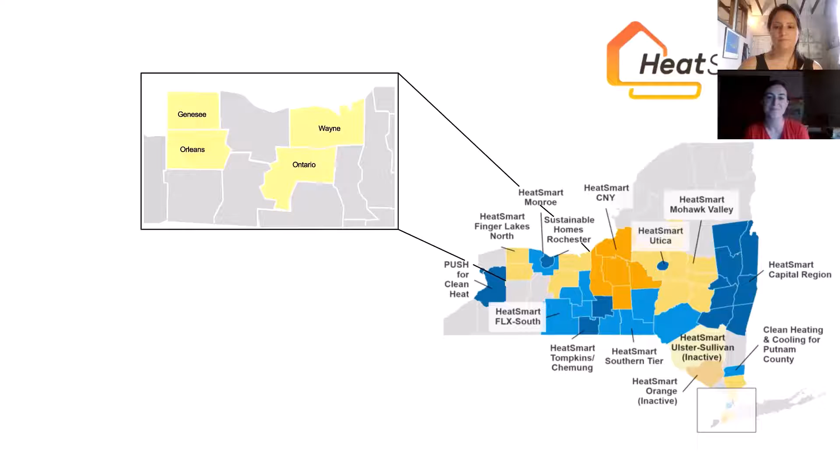So how do we do this? Well, clean heating and cooling technologies and the HeatSmart Finger Lakes North campaign are focused on heat pump technologies and weatherization. We cannot forget about everything else we need to do in order to meet these rigorous climate goals.

Policy priorities must include rapidly scaling demand for low carbon and high performance, efficient building shell and weatherization measures for both new construction and retrofits; flexible building loads; cost reduction in technologies to make them more approachable and affordable for the average user; and technology innovation for electrical heating equipment in buildings and appliances, which will also help lead to the cost reduction that is so desperately needed. We also need to manage an energy transition that is equitable and just. This bullet point might be one of the most important: we need to ensure that all New Yorkers can be part of this transition.

In order to meet these goals, commercially available technologies will need to be normalized. Technologies such as cold climate air source heat pumps, ground source heat pumps, or carbon-free community thermal loops for space heating and cooling, heat pump water heaters with storage tanks and demand flexible controls, as well as electric induction cooktops and heat pump dryers. These technologies are used widespread regionally in places like Asia and Europe, as well as parts of Canada, and they're starting to become more popular in the United States, but we need to encourage the adoption of these technologies within the Finger Lakes region.

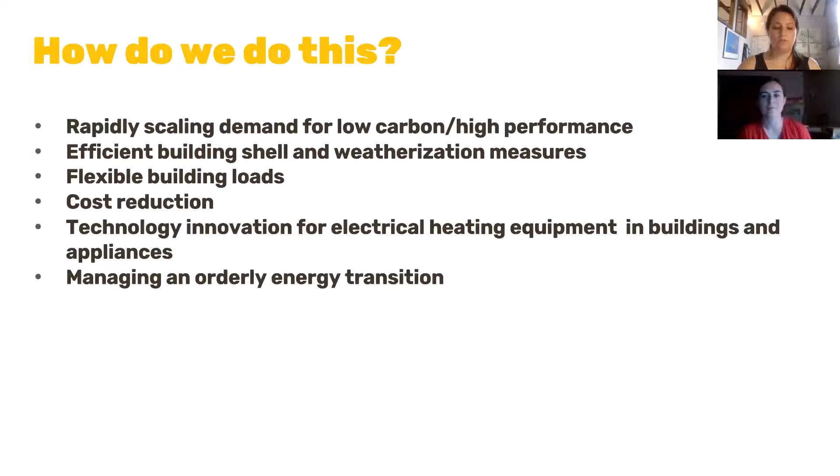So before we jump into the heat pumps that are part of this campaign, I just want to point out a heat pump you probably already have in your home: your refrigerator. A refrigerator is a simple heat pump that constantly removes heat out of the box and vents that into the room. A heat pump uses the same process: it pulls heat from somewhere colder than the indoor temperature and pumps that into your house.

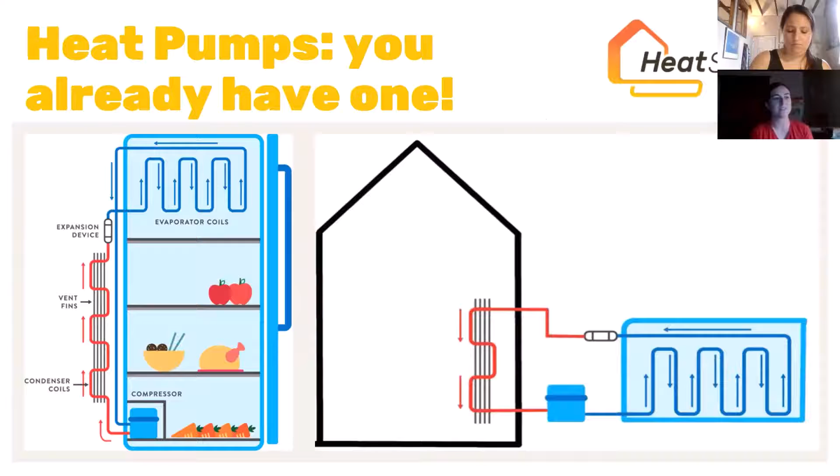Our myth number 1: there's only one type of heat pump.

When it comes to heat pumps, you have two primary options: a ground source heat pump and an air source heat pump. Also known as a geothermal heat pump, a ground source heat pump draws heat from the ground and transfers it evenly throughout your home, reversing that process during the summer. A ground source heat pump will save you about $500 a year if you're switching from gas.

If you're switching from something like propane, you'd be looking to save about $1,800 to $2,200 per year.

Air source heat pumps extract heat from the outside air and distribute it evenly throughout your home. As with geothermal heat pumps, the process is reversed during warmer months. Gas and air source heat pumps typically cost about the same to operate. If you're switching over from propane, you'd be looking at savings of about $1,300 to $1,600 per year.

Each home will have different cost savings depending on the technology installed and the energy source you're moving away from. So please don't hesitate to reach out to JJ or myself if you'd like to talk about your personal case.

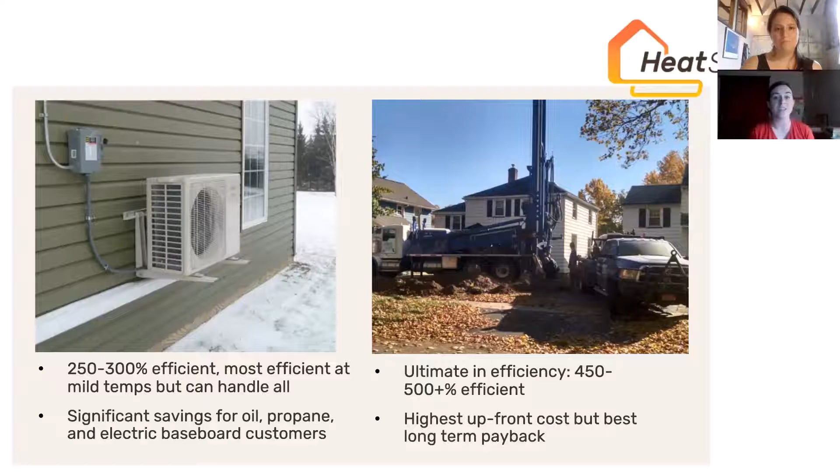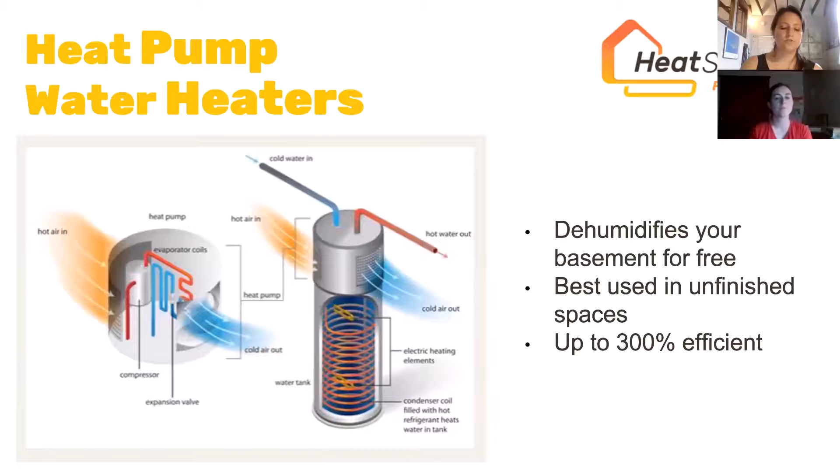Heat pump water heaters are also a really great option. The same heat pump technology that is used to pull heat out of the air can also heat your water. Heat pump water heaters have a great side benefit in that the heat pump cycle dehumidifies the air, which is really great for basements in humid climates just like ours. They're highly efficient and can also save about $150 a year over gas hot water heaters.

Myth number 2: it's too expensive. The reality is it has never been more affordable. There are income-based subsidies, geothermal federal tax credits, New York State grants and utility rebates, and low-interest New York State financing to make this more affordable. In many cases, loan payments can be lower than the amount you save on energy.

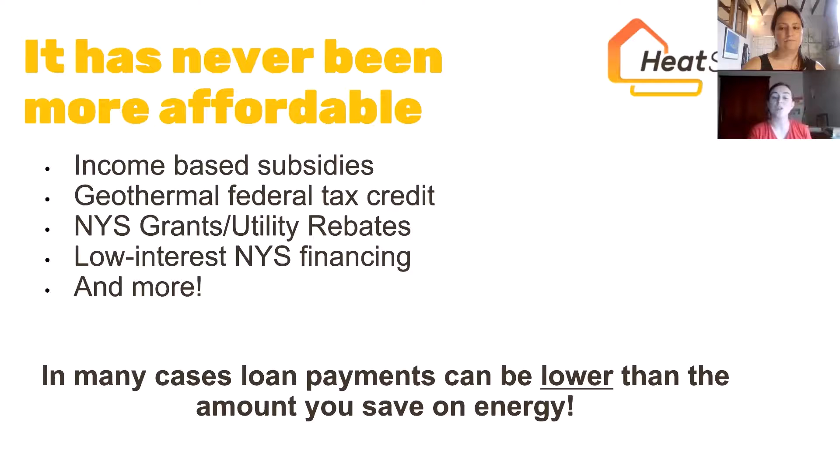Myth number 3: it's only for new construction. Actually, you can put a heat pump in any age building. Old buildings often have a better payback for geothermal and solar due to generally having higher energy costs, typically because there are a lot of air gaps or poor insulation. The process may need to be a bit more tailored to older homes, but many of the contractors in our area have a lot of experience working with our older housing stock. Old lath and plaster walls can be filled with cellulose, no different from drywall, and air sealing around perimeter walls works really well in older homes.

JJ is about to discuss the importance of an energy assessment to determine how to improve insulation in your old home. But it's also really important to have an energy assessment done on any age home to make sure that the new system you install works as efficiently and effectively as possible.

In most cases, the first order of business is getting your free energy assessment. This will tell you if there's any work that needs to be done to improve the insulation to your home and seal any air gaps. Things like blowing cellulose insulation into walls or attics, or adding spray foam to air gaps or hard to insulate places, can significantly reduce the energy use of your building and make any heating system run more efficiently, especially heat pumps.

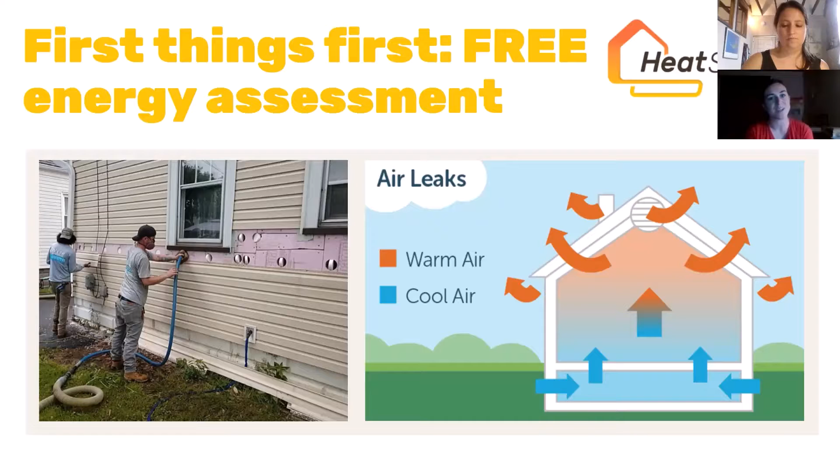This is the typical client pathway for working in the HeatSmart Finger Lakes program. You'll first have a conversation with a HeatSmart expert, either JJ or myself, to discuss your heating and cooling needs, your goals, and your current system.

Based off of that conversation, you'll then be paired with one of our vetted installers. Typically, you'll have that free energy assessment done on your home, where the installer and contractor will find any inefficiencies in your heating and cooling system. And based off of that and your general heating and cooling needs, the installer will provide recommendations and a quote that you as a client can then decide to move forward with.

Installers will make sure that the solution is best suited for your home, your family, and most importantly, your budget. And they'll also ensure that you can take advantage of any of the subsidy opportunities or funding that is available that we previously discussed.